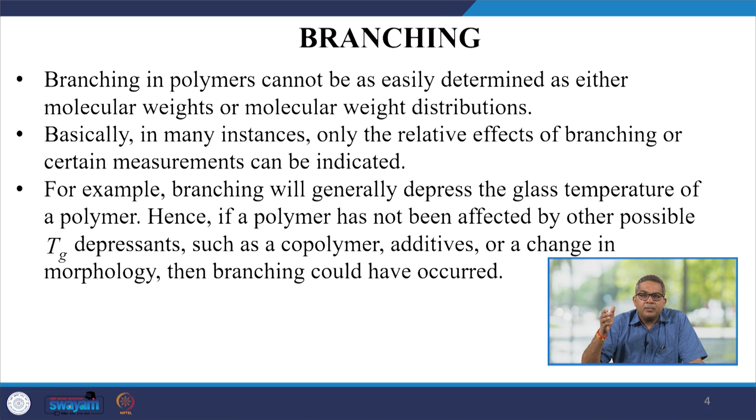So, if a polymer has not been affected by other possible glass transition depressants such as copolymer, additives or change in the morphology, the branching could have occurred. The degree of branching affects the intrinsic viscosity. The greater the branching, the more compact the packing of the polymer in the solution. We are having the different chains, and if there is branching, the more compact structure would be there, and at equal molecular weights a branched polymer will have a lower intrinsic viscosity. So, when we determine the molecular weight distribution through the viscometer, it plays a vital role.

Now, let us take an example. Since the branched molecules tend to become still more highly branched, they concentrate at the high molecular weight end of the distribution. So, the resulting presence of a long high molecular weight tail reflects the possibility of branching. This can increase the solubility of a polymer.

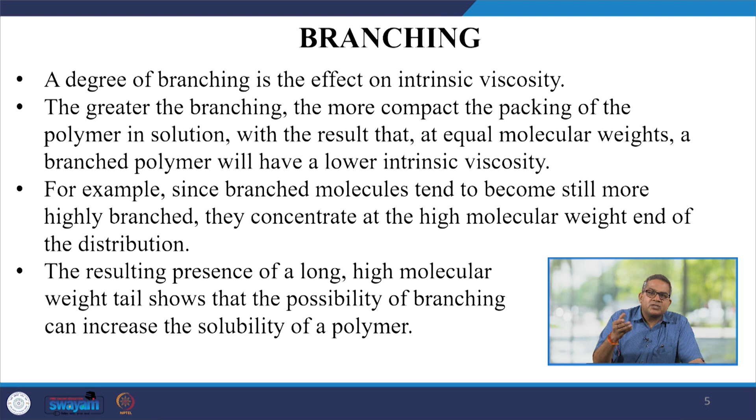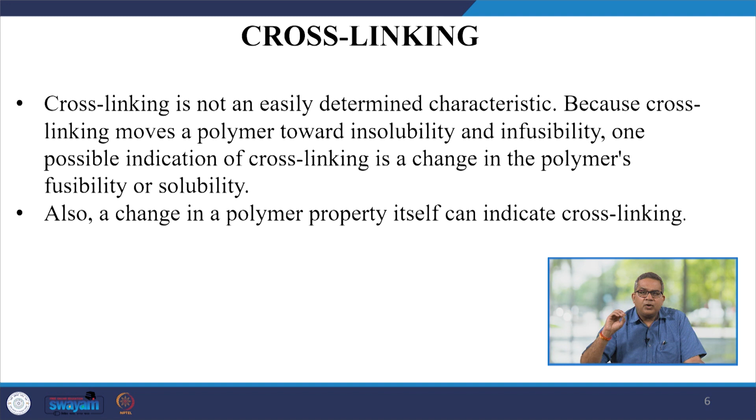Let us take up the cross-linking. Now, cross-linking is not an easily determined characteristic, because cross-linking moves a polymer towards insolubility or infusibility, because of the presence of a network structure. So, one possible indication of cross-linking is a change of the polymer's fusibility or solubility. A change in a polymer property itself can indicate the cross-linking. So, different methods are there for determination of the cross-linking.

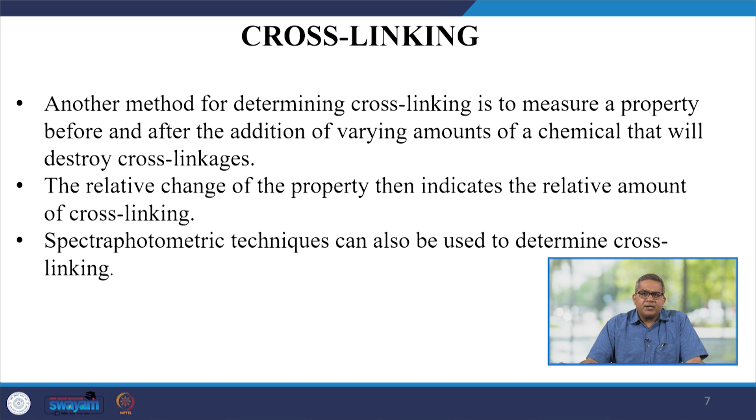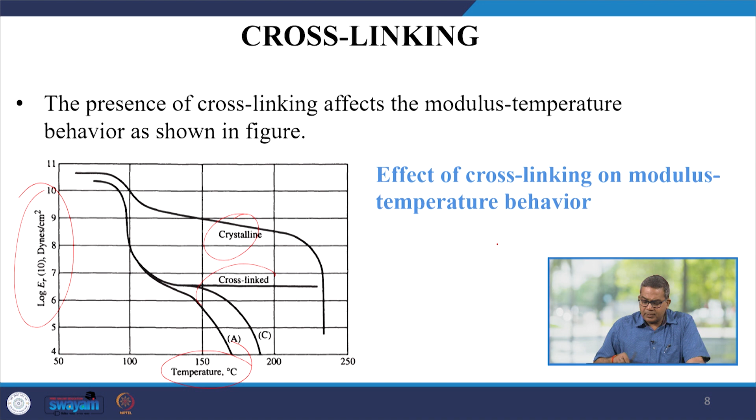One method is to measure a property before and after addition of varying amounts of a chemical that will destroy the cross-linkage, so that it can break this network, and then determine the relative change of property. This indicates the relative amount of cross-linking. Some spectrophotometric techniques are available to determine the cross-linking aspects. Now, here you see that different types of cross-linking affect the modulus-temperature behavior. Here the temperature versus the crystalline cross-linking, different types of effects are discussed in this particular plot.

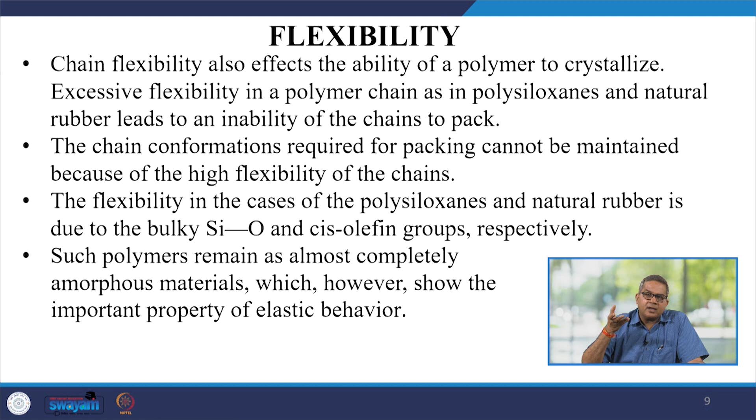The chain flexibility affects the ability of a polymer to crystallize. The excessive flexibility in a polymer chain, as in the polysiloxanes and natural rubber, leads to an inability of the chains to pack. The chain conformation may require packing which cannot be maintained because of the high flexibility of the chains. The most basic approach to measuring polymer chain flexibility is to use the concept of a completely flexible chain molecule, then introduce the way in which the structure can restrict the rotation, hence alter flexibility.

So, in a hypothetical way, you have the completely flexible system, and then you restrict the flexibility, you restrict the motion of the chains, you restrict the rotation of the chains, and then alter the flexibility, and you measure all these things. Polyacrylonitrile, which is theoretically 100% flexible, is actually stiff because of the steric hindrance of its large nitrile groups. So, steric hindrance causes the stiffness.

Now polyamides are again theoretically 100% flexible, but they are quite stiff because of the hydrogen bonding between the chains. So suppose you wish to make them 100% flexible, you need to destroy the hydrogen bonding or you need to eliminate the steric hindrance. The stiffness of the chain can be obtained from the value of r squared, which is the mean square end-to-end distance of a chain.

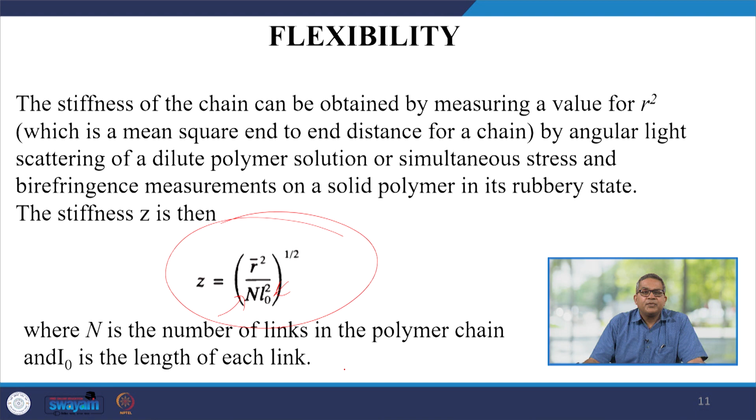This is obtained by angular light scattering of a dilute polymer solution, or simultaneous stress and birefringence measurement on a solid polymer in its rubbery state. So, this is the mathematical representation for the measurement of stiffness. Here N is the number of links in the polymer chain and L naught is the length of each link. Another useful method for measuring the flexibility is to use the material's sonic modulus.

The sample used should be unoriented, measured below the glass transition temperature. If it is done, the chain stiffness will correlate with the sonic velocity, that is, the greater the velocity, the greater the chain stiffness.

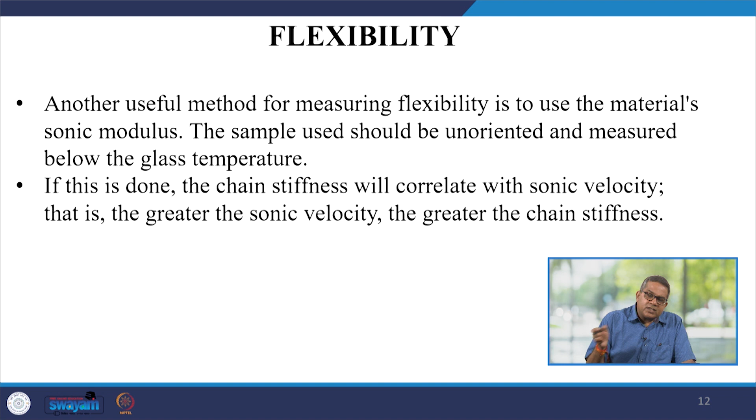So, by this way you can find out the flexibility. Crystalline and amorphous behavior. The solid polymers differ from ordinary low molecular weight compounds in the nature of their physical state or morphology. Most polymers show the simultaneous characteristics of both crystallinity and amorphousness. X-ray or electron diffraction patterns often show the sharp features typical of three-dimensional ordered crystalline solids as well as the diffuse unordered features characteristic of amorphous solids.

The terms crystalline and amorphous are used to indicate the ordered and unordered polymer regions respectively. Different polymers show different degrees of crystalline behavior, and the known polymers constitute a spectrum of materials from those that are completely amorphous to others that possess low to moderate to high crystallinity.

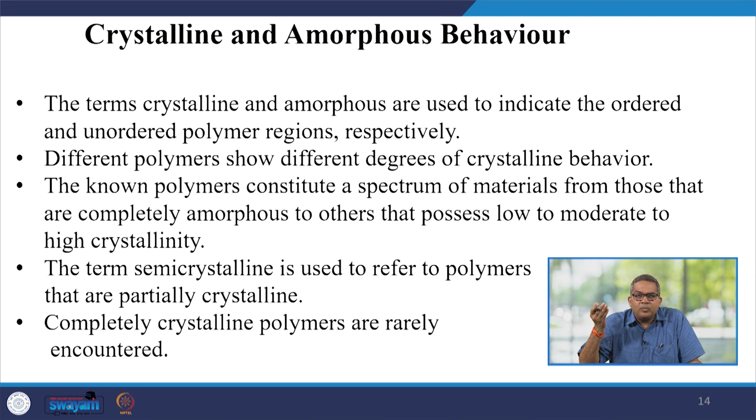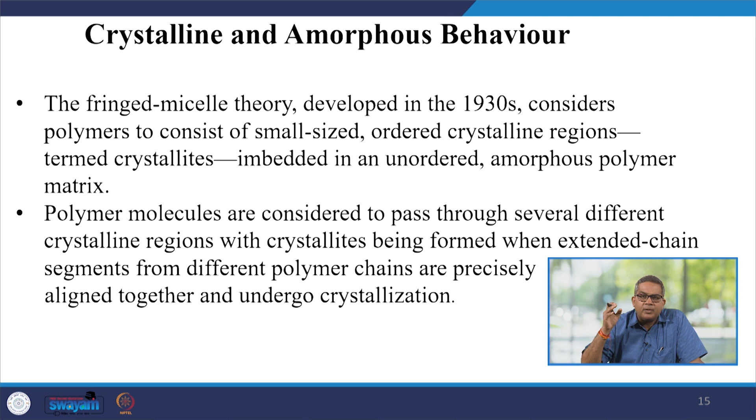The fringed micelle theory, developed way back in 1930, considers the polymer to consist of small-sized ordered crystalline regions, termed crystallites. They are embedded in an unordered amorphous polymer matrix. The polymer molecules are considered to pass through several different crystalline regions, with the crystallites being formed when extended chain segments from different polymer chains are precisely aligned together and undergo crystallization.

Now, each polymer chain can contribute ordered segments to several crystallites. The segment of the chain between the crystallites makes the unordered amorphous matrix. This particular aspect is presented over here. This is a schematic diagram of the fringed micelle model of polymer amorphous crystalline structure.

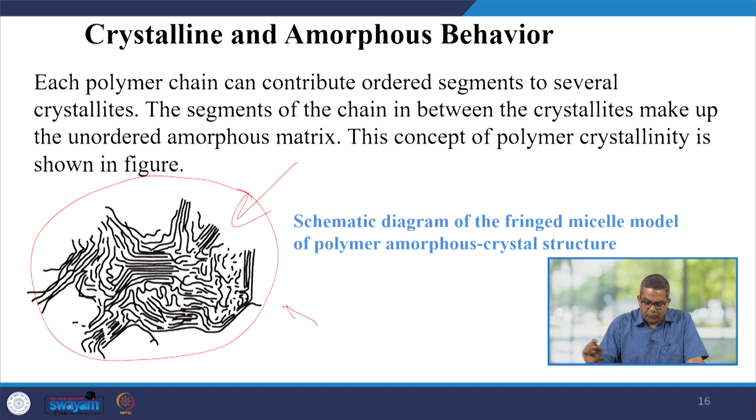The folded chain lamella theory arose way back in 1950, when polymer single crystals in the form of thin platelets termed lamellae, measuring about 10,000 angstrom by 100 angstrom, were grown from polymer solution. Contrary to what people had expected, the X-ray diffraction pattern shows the polymer chain axis to be parallel to the smaller dimension of the platelet.

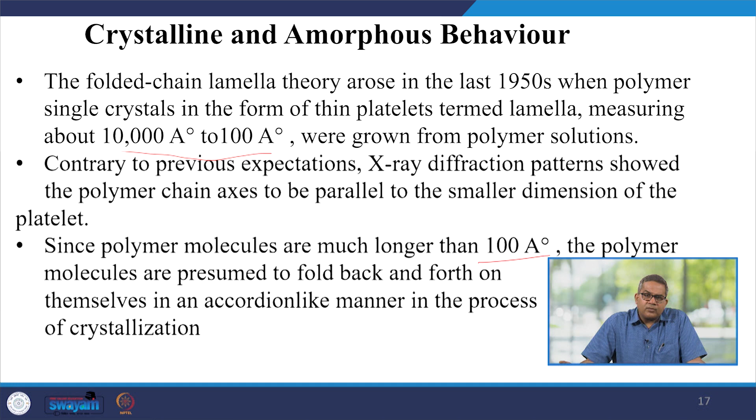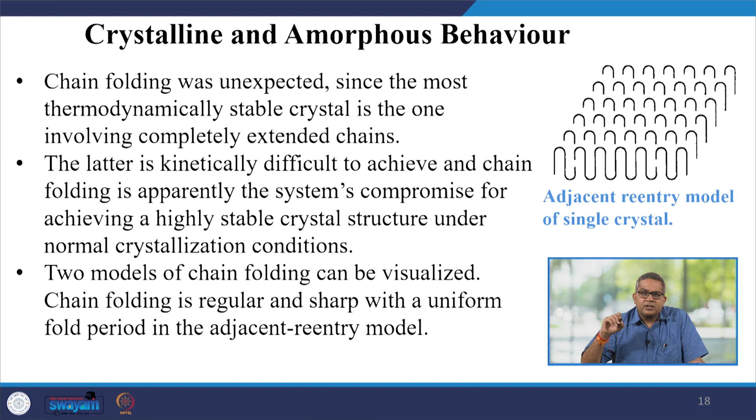Now, since the polymer molecules are much larger than 100 angstrom, they are presumed to fold back and forth on themselves in an accordion-like manner in the process of crystallization. The chain folding was unexpected since the most thermodynamically stable crystal is one involving completely extended chains. Kinetically it is difficult to achieve this, and chain folding is apparently the system's compromise for achieving a highly stable crystal structure under normal crystallization conditions.

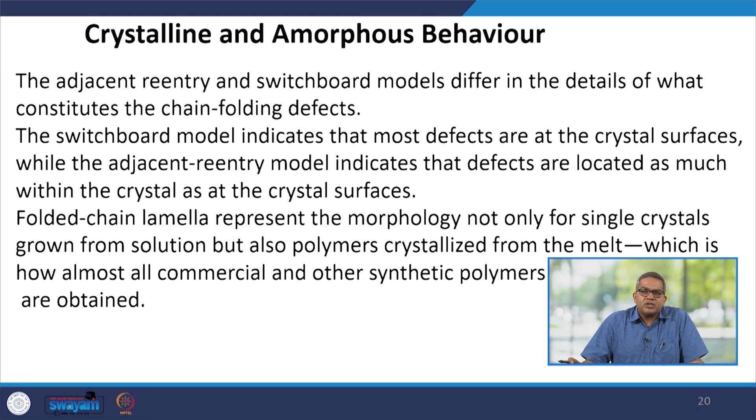Now, these defects may be imperfect folds like this, irregularities in packing, chain entanglements, loose chain ends, dislocations, occluded impurities, or numerous other imperfections. The adjacent re-entry model, like here, and the switchboard model differ in detail of what constitutes the chain folding defects. The switchboard model usually indicates most defects are in the crystal surfaces, while the adjacent re-entry model indicates the defects are located as much within the crystals as at the crystal surfaces.

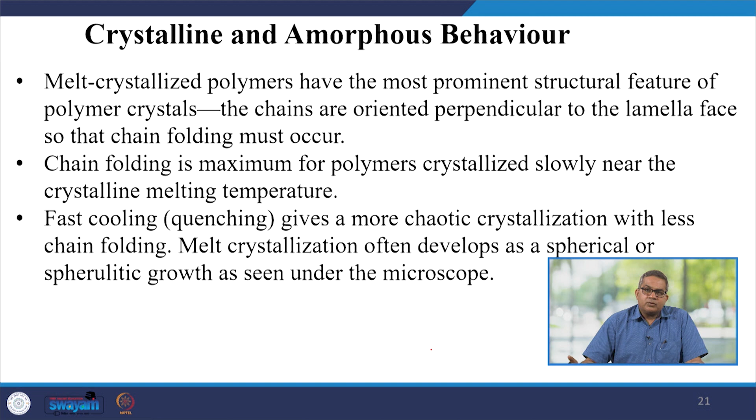Melt crystallized polymers have the most prominent structural features of polymer crystals. The chains are oriented perpendicular to the lamella face so that chain folding must occur. Chain folding is usually maximum for polymers crystallized slowly near the crystalline melting temperature. Fast cooling, sometimes referred to as quenching, gives more chaotic crystallization with less chain folding, and melt crystallization often develops spherulitic growth which can be seen only under the microscope.

Nucleation of crystal growth occurs at various nuclei, and the crystal growth proceeds in a radial fashion from each nucleus until the growth fronts from neighboring structures impinge on each other. These spherical structures, termed spherulites, completely fill the volume of the crystallized polymer sample. The spherulites have different sizes, and their degrees of perfection depend on the specific polymer and crystallization conditions.

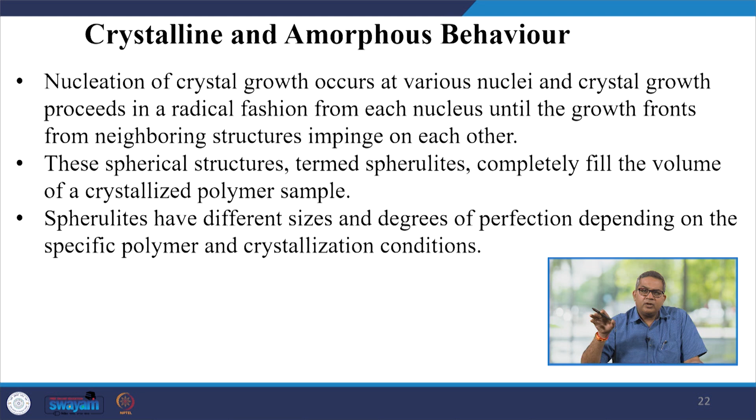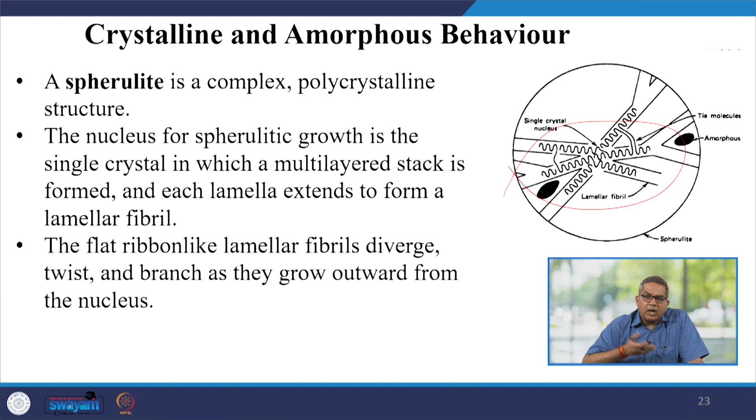A spherulite is a complex polycrystalline structure. The nucleus of spherulitic growth is a single crystal, on which a multi-layered stack is formed, and each lamella extends to form a lamellar fibril. The flat ribbon-like lamellae, like here you see, diverge, twist and branch as they grow outward from the nucleus. The growth usually occurs by chain folding, with the polymer chain axis being perpendicular to the length of the lamella.

Now, the strength of the polymer indicates that more than van der Waals forces hold the lamellae, and these are interlamellar or intercrystalline fibrils, also termed tie molecules, between the lamellar fibrils within the spherulite and between the fibrils of different spherulites. Some of the polymer molecules simultaneously participate in the growth of two or more adjacent lamellae and provide molecular links that reinforce the crystalline structure.

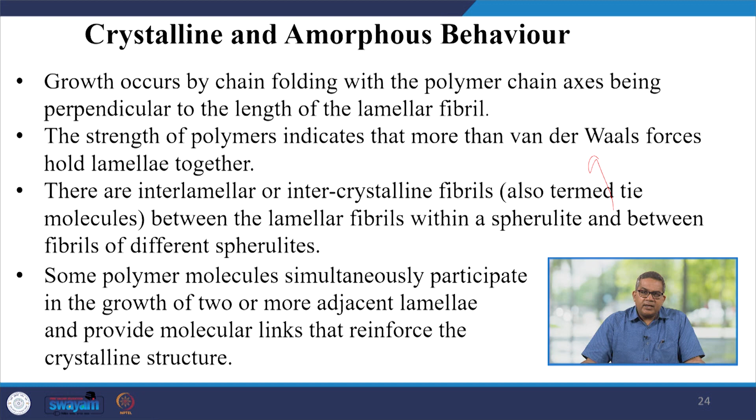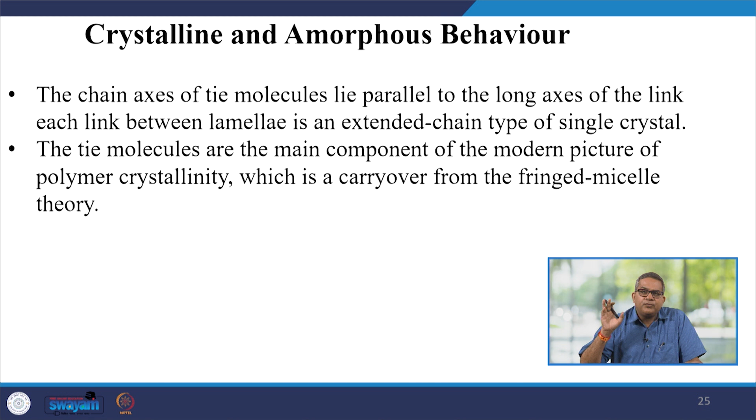So, the chain axis of the tie molecule lies parallel to the long axis of the link. Each link between the lamellae is an extended chain type of single crystal. The tie molecules are the main component of the modern picture of polymer crystallinity, which is the carryover from the fringed micelle theory.

The amorphous content of a semicrystalline or melt-crystallized polymer sample consists of the defects in the chain folding structure, the tie molecules, and the material that, either because of entanglement, is not included in the growing lamellar fibrils or is rejected from it owing to its unacceptable nature.

Some natural polymers like cotton, silk and cellulose have the extended chain morphology, but their morphologies are determined by enzymatically controlled synthesis and crystallization processes. The extended chain morphology is obtained in some synthetic polymers under certain circumstances. This includes crystallization from the melt under pressure or applied stress, and crystallization of the polymer from the liquid crystalline state.

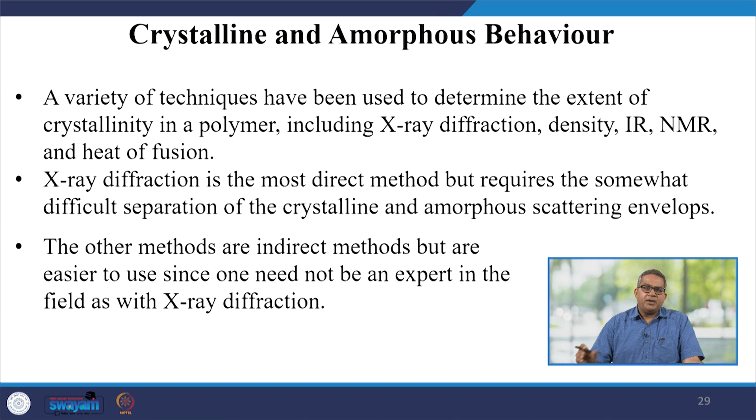A variety of techniques have been used to determine the extent of crystallinity in the polymer. This includes XRD or X-ray diffraction, density, infrared, NMR, and heat of fusion. XRD is the most direct method, but it requires somewhat difficult separation of the crystalline and amorphous scattering envelopes. The other methods are indirect, but easier to use since one need not be an expert in the XRD tool. Heat of fusion is probably the most often used method since reliable thermal analysis instruments are commercially available and easy to use.

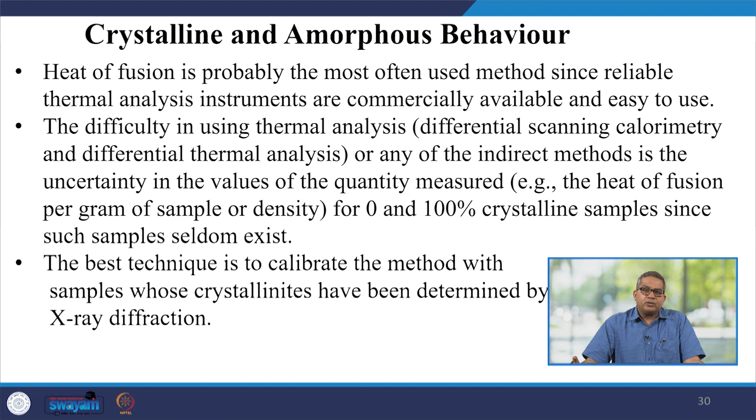The difficulty in using thermal analysis like DSC, differential scanning calorimetry, or DTA, differential thermal analysis, or any other indirect method is uncertainty in the values of the quantity measured for 0 and 100% crystalline samples, since such samples seldom exist. It is very rare to find such a reference sample. The best technique is to calibrate the method with samples whose crystallinity has been determined by XRD.

Now, how can we determine polymer crystallinity? Regardless of the precise picture of order and disorder in polymers, the prime consideration that should be emphasized is that polymers have a tendency to crystallize. The extent of this crystallization tendency plays a most significant role in the practical way in which polymers are used, as a consequence of the large effect of crystallinity on thermal, mechanical and other important properties. Different polymers have different properties; they are synthesized and used differently because of the varying degree of crystallinity.

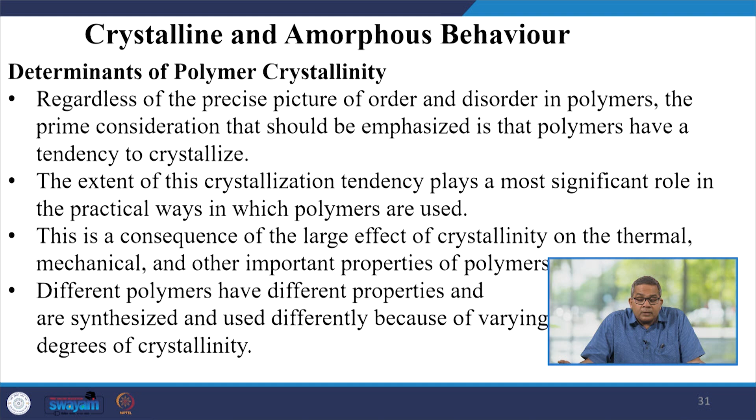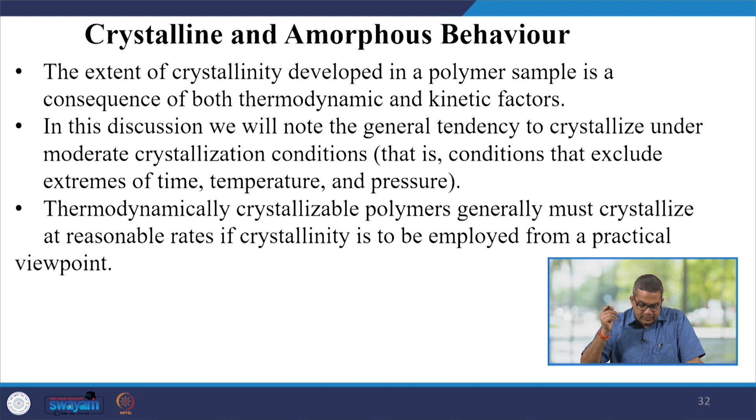The extent of crystallinity developed in a polymer sample is a consequence of both thermodynamic and kinetic factors. We will notice the general tendency to crystallize under moderate crystallization conditions, that is, conditions that exclude the extremes of time, temperature and pressure. These three are the most important variables. Thermodynamically crystallizable polymers must generally crystallize at reasonable rates if crystallinity is to be employed from a practical viewpoint.

Now, the extent to which a polymer crystallizes depends on whether its structure is conducive to packing into the crystalline state and on the magnitude of the secondary attractive forces of the polymer chains. Packing is facilitated for polymer chains that have structural regularity, compactness, streamlining and some degree of flexibility. The stronger the secondary attractive forces, the greater will be the driving force for ordering and crystallization of polymer chains. Some polymers are highly crystalline primarily because their structure is conducive to packing, and in other polymers, both factors may be favorable for crystallization.

Let us take the example of polyethylene. It is essentially the best structure in terms of its ability to pack into the crystalline state. Its very simple and perfectly regular structure allows chains to pack tightly and without any restriction as to which segment of one chain needs to line up next to which other segment of the same chain or another chain. The flexibility of the polyethylene chain is also very conducive towards crystallization in the conformation required for packing. This can be easily achieved even though the secondary attractive forces are small. Polyethylene crystallizes easily and to a high degree because of its simple, regular, linear structure. Polymers other than polyethylene have less simple and regular chains.

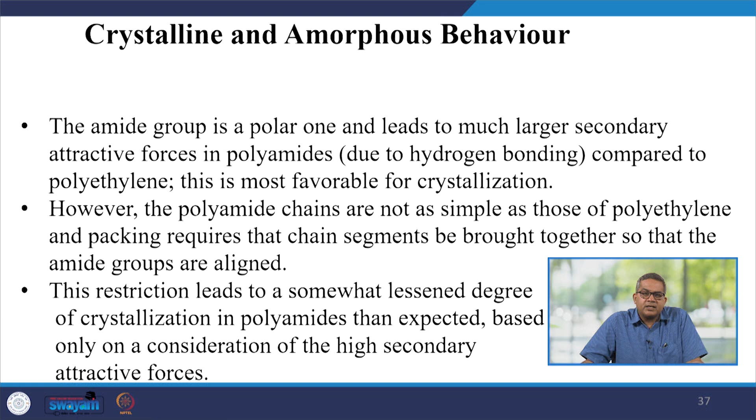The polyamide chains are not as simple as those of polyethylene, and packing requires that the chain segments be brought together so that the amide groups are aligned. This restriction leads to a somewhat lesser degree of crystallization in the polyamides than expected based only on a consideration of high secondary attractive forces. Now, the crystallinity in a polymer like polyamide can be significantly increased by mechanically stretching it to facilitate the ordering and alignment of polymer chains.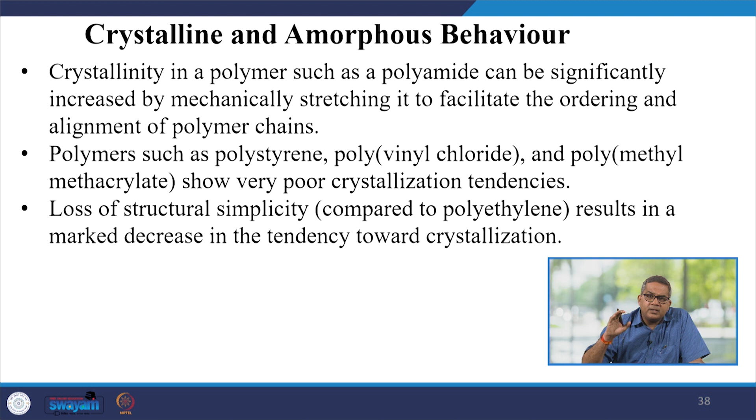Polymers such as polystyrene, PVC, and polymethyl methacrylate, PMMA, show very poor crystallization tendency. The loss of structural simplicity compared to polyethylene results in a marked decrease in the tendency toward crystallization. Fluorocarbon polymers such as PVF, polyvinyl fluoride, polyvinylidene fluoride, or polytetrafluoroethylene are exceptions. These polymers show considerable crystallinity since the small size of fluorine does not preclude packing into the crystalline lattice.

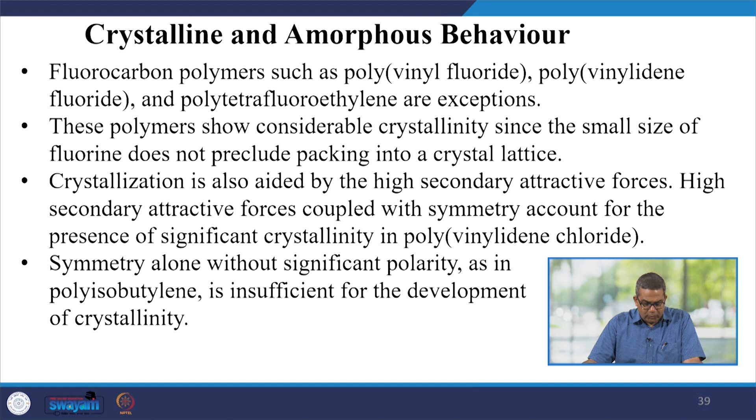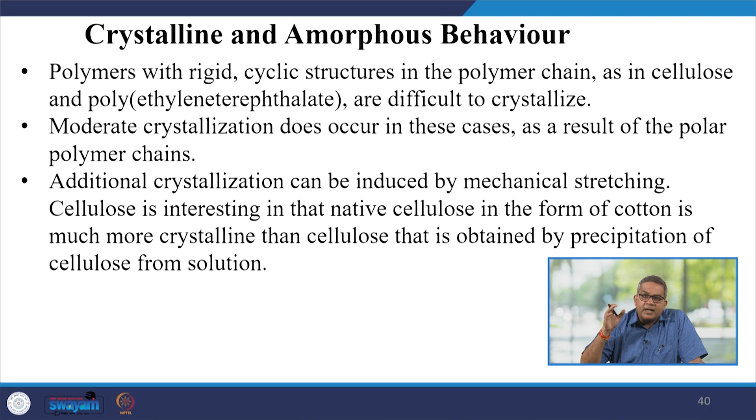High secondary attractive forces coupled with symmetry account for the presence of significant crystallinity in polyvinylidene chloride. Symmetry alone without significant polarity, as in polyisobutylene, is insufficient for the development of crystallinity. Polymers with rigid cyclic structures in the polymer chain, as in cellulose or polyethylene terephthalate, are difficult to crystallize. Moderate crystallization does occur in these cases as a result of their polar polymer chains. The biosynthesis of cotton proceeds with an enzymatic ordering of the polymer chain in spite of the rigid polymer chains.

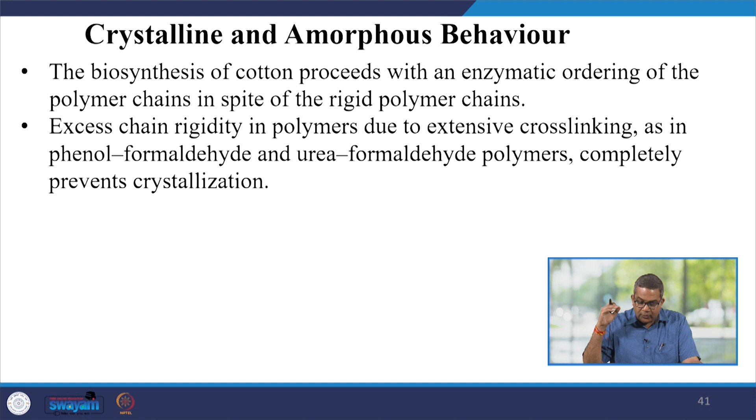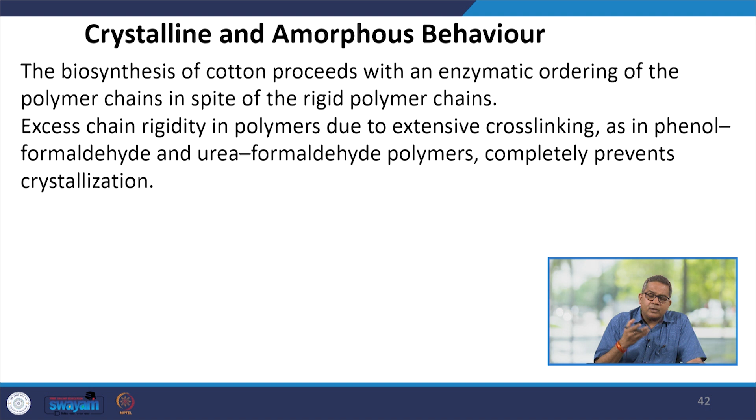Excess chain rigidity in the polymer due to extensive cross-linking, because cross-linking always hinders the free movement of the chains, is reflected in phenol formaldehyde and urea formaldehyde polymers, and this completely prevents the crystallization. Sometimes the excess chain rigidity causes several processability problems, which can be reduced by application of various additives during the course of processing.

Let us talk about the thermal transitions. Polymeric materials are characterized by two major types of transition temperatures: the crystalline melting temperature Tm and the glass transition temperature Tg. The crystalline melting temperature is the melting temperature of the crystalline domains of a polymer sample. This is the basic definition of Tm. The glass transition temperature is the temperature at which the amorphous domains of a polymer take on the characteristic properties of the glassy state: brittleness, stiffness, and rigidity.

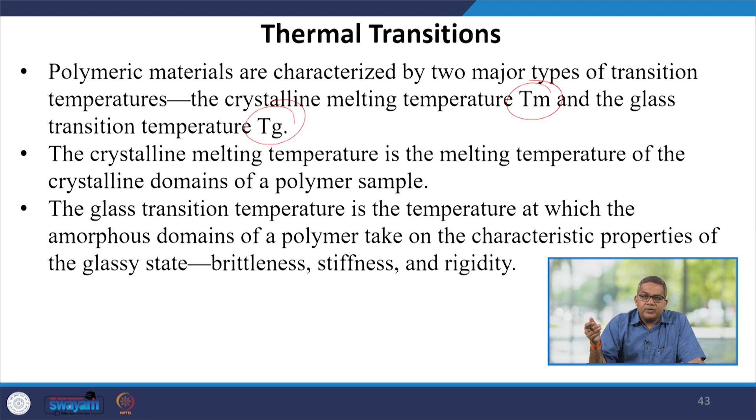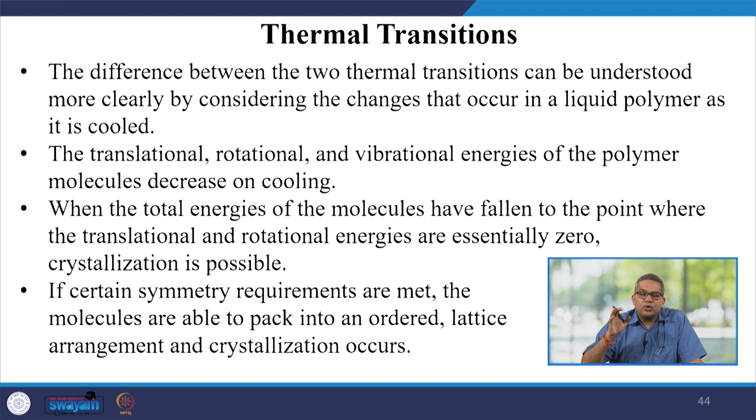The difference between the two thermal transitions can be explained more clearly by considering the changes that occur in the liquid polymer as it is cooled. So, you heat a liquid polymer, polyethylene, and then observe the behavior during cooling. The translational, rotational, and vibrational energies of the polymer molecules decrease on cooling. When the total energies have fallen to the point where the translational and rotational energies are essentially zero, crystallization is possible. If certain symmetry requirements are met, the molecules are able to pack into an ordered lattice arrangement and crystallization occurs.

However, not all polymers meet the necessary symmetry requirements for crystallization. If symmetry requirements are not met, crystallization does not take place, but the energies of the molecules continue to decrease as the temperature decreases. A temperature is finally reached, the glass transition temperature, at which the long range motion of the polymer chain ceases. The long range motion is also referred to as segmental motion. This refers to the motion of a segment of the polymer chain by concerted rotation of bonds at the ends of the segment.

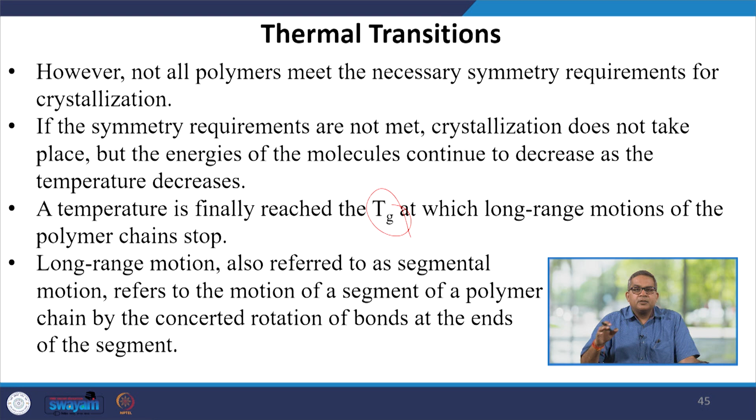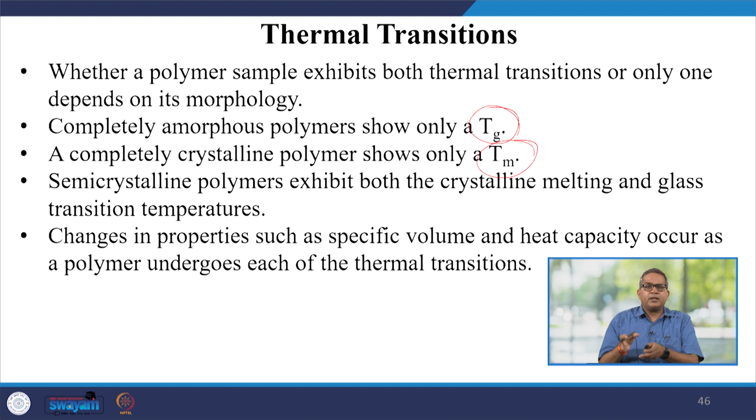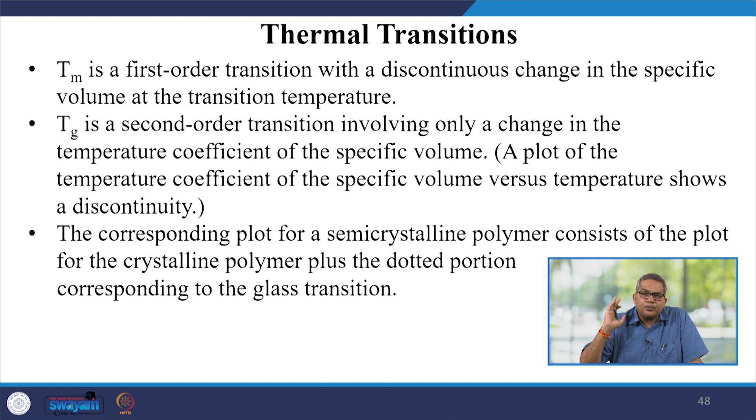Tm is a first order transition with a discontinuous change in the specific volume at the transition temperature, and the glass transition temperature is a second order transition involving only a change in the temperature coefficient of specific volume. So, a plot of the temperature coefficient of specific volume versus temperature shows the discontinuity. The corresponding plot for the semi-crystalline polymer consists of the plot of a crystalline polymer plus a dotted portion for the glass transition. Here you see.

A variety of methods have been used to determine the glass transition temperature and Tm. These include dilatometry, that is the determination of specific volume, thermal analysis, dynamic mechanical behavior, dielectric loss, broadline NMR, etc. The most common method is DSC, differential scanning calorimetry.

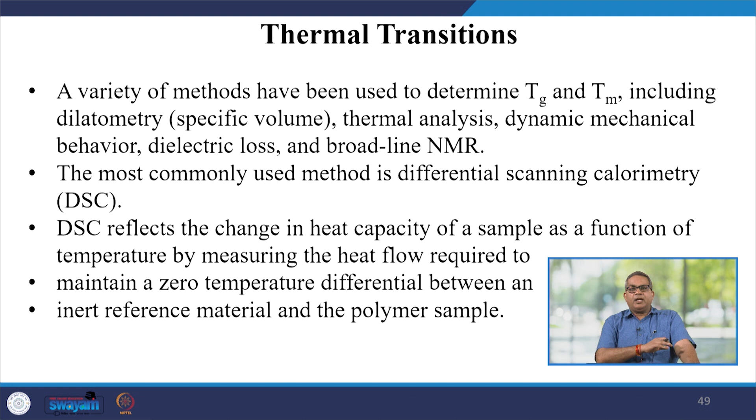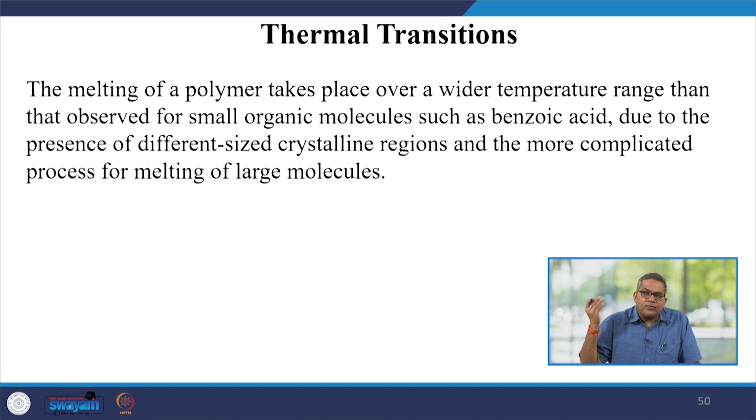This reflects the change in the heat capacity of a sample as a function of temperature by measuring the heat flow required to maintain a zero temperature differential between an inert reference material and a polymeric material. The melting of a polymer takes place over a wider temperature range than that observed for a small organic molecule such as benzoic acid, due to the presence of different size crystalline regions and a more complicated process for melting of large molecules.

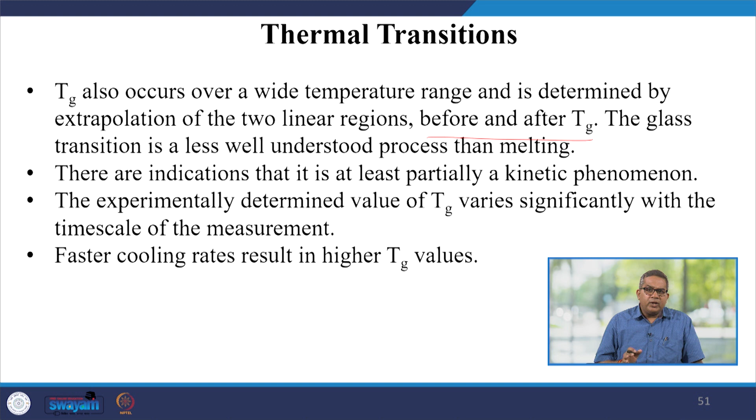The glass transition temperature also occurs over a wide temperature range and is determined by extrapolation of two linear regions before and after the glass transition. The glass transition is a less well understood process than melting. There are various indications that it is at least partially a kinetic phenomenon, and experimentally determined values of glass transition temperatures vary significantly with the time scale of measurement. Faster cooling results in higher glass transition values.

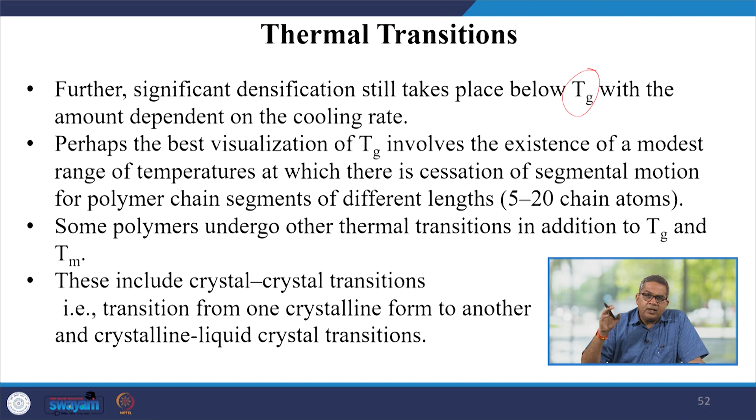Significant densification still takes place below the glass transition temperature, where the amount is dependent on the cooling rate. The best visualization of the glass transition involves the existence of a modest range of temperature at which there is a cessation of the segmental motions of different polymeric chains. Some polymers may undergo thermal transitions in addition to Tg and Tm, including crystal-crystal transitions. The values of Tg and Tm for a polymer affect the mechanical properties at any particular temperature and determine the temperature range in which the polymer can be employed.

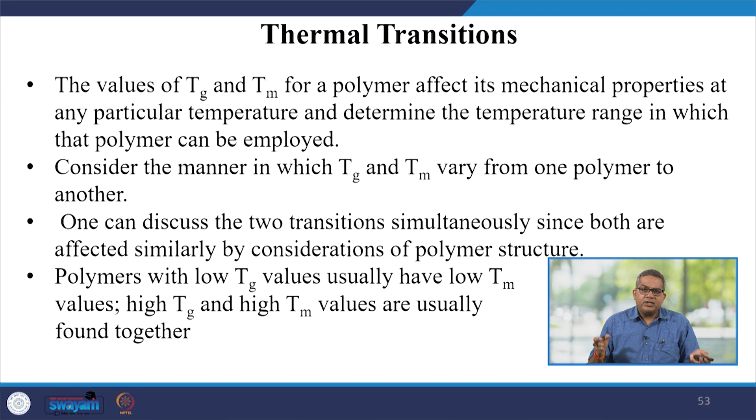Let us consider the manner in which Tg and Tm vary from one polymer to another. One can discuss the two transitions simultaneously since both are affected similarly by polymer structure. Polymers with low Tg values usually have low Tm values; high Tg and high Tm values are usually found together. Polymer chains that do not easily undergo bond rotation so as to pass through a glass transition would also be expected to melt with difficulty. High secondary attractive forces also decrease the mobility of the amorphous polymer chain. So, the movement of the chain is very important. Decreased mobility increases chain rigidity, giving a more compact structure and high glass transition temperature, and the Tm of crystalline polymers produced from such rigid chains would also be very high.

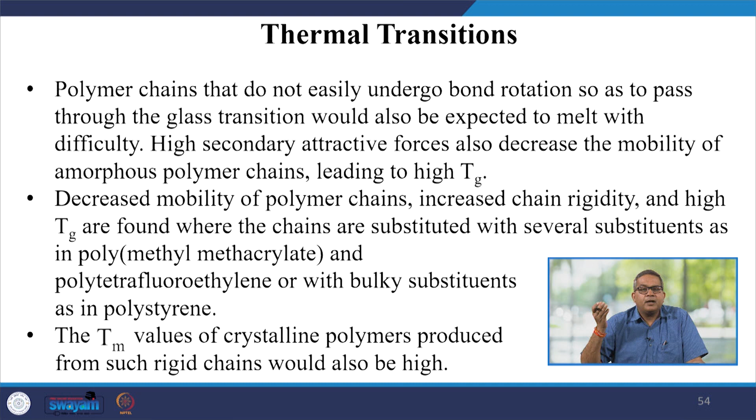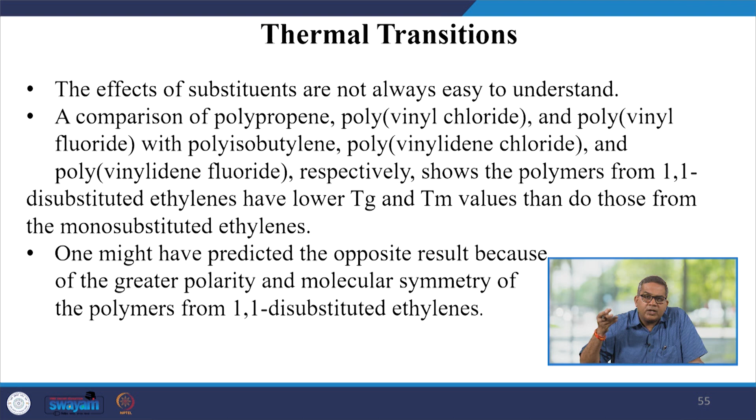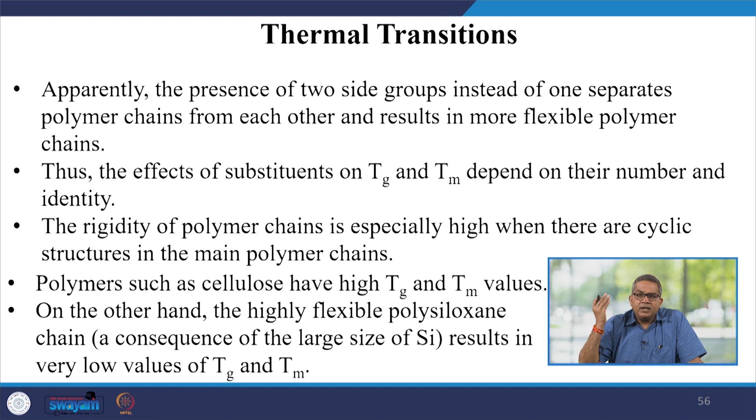The effect of substituents is not always easy to understand. Consider the comparison of polypropylene, polyvinyl chloride, polyvinyl fluoride, polyisobutylene, polyvinylidene chloride and polyvinylidene fluoride. This shows that polymers from 1,1-disubstituted ethylenes have lower Tg and Tm values than those from monosubstituted ethylenes. Apparently, the presence of two side groups instead of one separates the polymer chains from each other and results in a more flexible polymer chain. Therefore, the effect of substituents on Tg and Tm depends on their number and identity. The rigidity of the polymer chain is especially high when there are cyclic structures in the main chain.

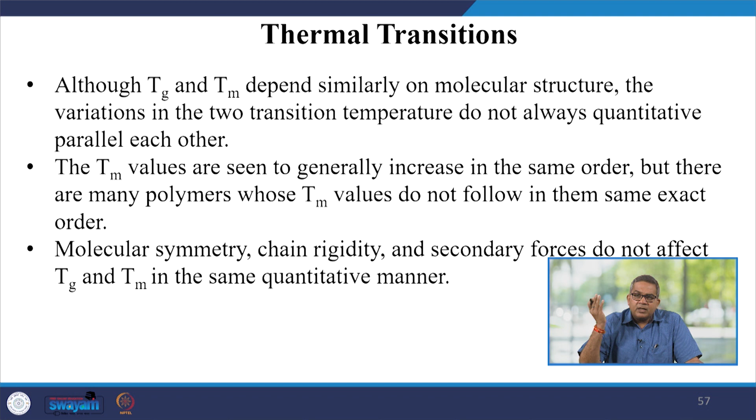Although Tg and Tm depend similarly on molecular structure, the variations in the two transition temperatures do not always quantitatively parallel each other. Tm values generally increase in the same order, but there are many polymers whose Tm values do not follow to the same extent. Polyethylene and polyoxymethylene have low glass transition values because of their highly flexible chains. However, their simple and regular structure yields tightly packed crystal structures with high Tm values. An empirical consideration is the ratio of Tg to Tm in Kelvin temperature for various polymers. The Tg/Tm ratio is approximately one half for symmetric polymers.

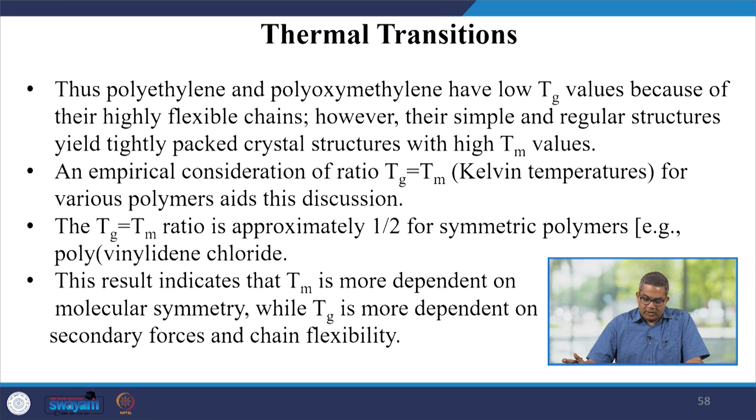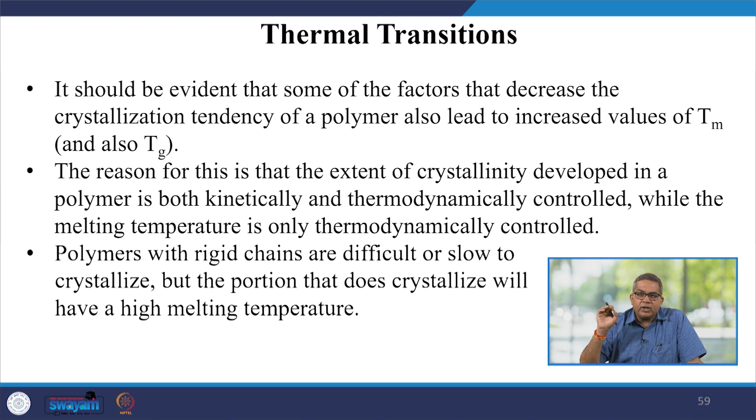It should be evident that some of the factors that decrease the crystallization tendency of a polymer also lead to increased Tm, and if Tm is increasing, Tg will also increase. The reason is that the extent of crystallinity developed in a polymer is both kinetically and thermodynamically controlled, while the melting temperature is only thermodynamically controlled. Comparing polyethylene and polyhexamethylene adipamide, polyethylene tends to crystallize easier and faster than the polyamide because of its simple and highly regular structure, and is usually obtained with a greater degree of crystallinity. On the other hand, the Tm for the polyamide is much higher, by about 130 degrees Celsius, than that of polyethylene because of much greater secondary forces.

So, dear friends, in this segment we discussed the different behaviors of polymers, especially the glass transition temperature and melting temperature, and the different aspects through which we can determine the properties.